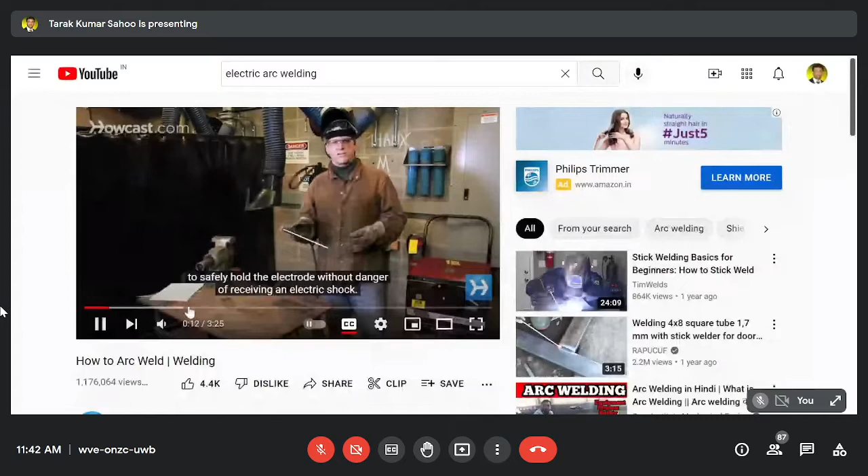Audio is clear, students? Students, different audio is clear? Yes, sir.

So you see welding here, the machine is on and the ground clip is connected, so you can see here, this is your base metal. All of you can see my arrow, isn't it? Yes, sir. My cursor arrow, all of you can visualize, isn't it, which I am rolling on the video screen. Okay, so this is your base metal in which one connection is given.

This is your positive connection, the anode connection. This is given to the work material. Basically we call the base material as work material. And the part of the connection which this person is holding with his hand, that is your cathode or negative point. So to the negative or cathode point, this rod is being attached. This is the electrode material. Now this electrode material he is using for electric arc welding.

Okay, so let us play this video and let us see how this welding procedure is being carried out.

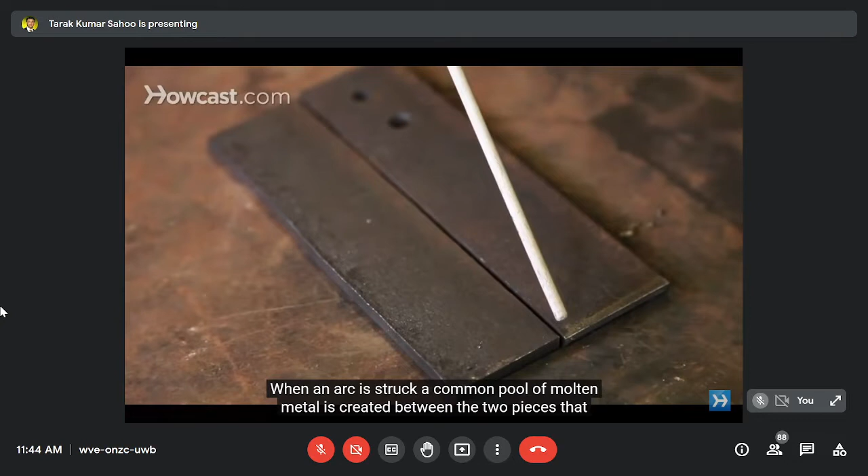The electricity flows through the electrode holder, down through the work, and back out through the ground clamp back to the welder. When an arc is struck, a common pool of molten metal is created between the two pieces being joined. Into this, the melting alloy center of the welding rod is deposited, completing the weld.

One thing to be careful of: as you're welding, this rod is being consumed, that is, it's growing shorter. So the operator has to constantly be aware of both moving the rod laterally, but also pushing the rod into the seam being welded.

The first step in learning how to arc weld is learning how to strike the arc. Striking the arc can sometimes be very difficult at first. It's a delicate flicking motion, not a stabbing or a quick drag, but as if you're striking a match gently. Once the arc has started, the trick is to maintain a nice smooth molten puddle of metal with a consistent distance between the tip of the welding rod and the surface of the work.

All right, let's give it a try. Welding hood's down. Remember, never look at an arc with the naked eye.

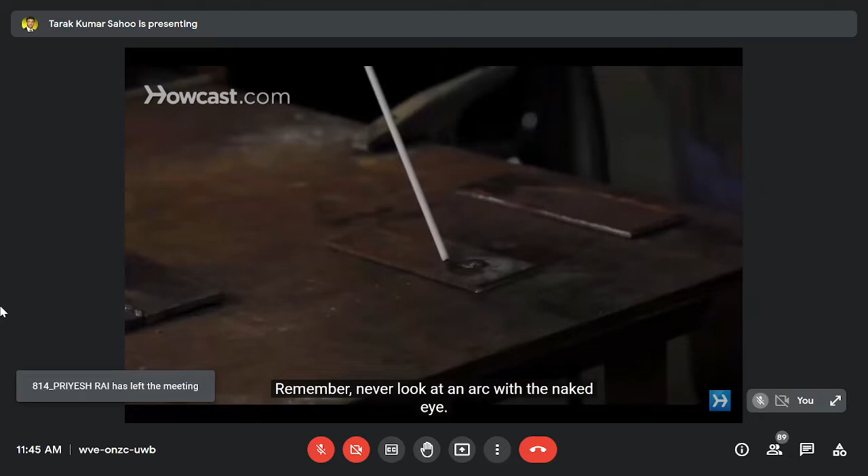Now that you've mastered striking the arc, and it may have taken you several tries, don't be discouraged. Let's join some metal together. Hood's down. After striking the arc, I create a nice even pool of molten metal. You'll notice that the tip of the welding rod stays very near to the arc puddle, and that I'm also slightly wavering the tip of the electrode back and forth. The idea is to heat both pieces of metal evenly as the filler rod is being deposited.

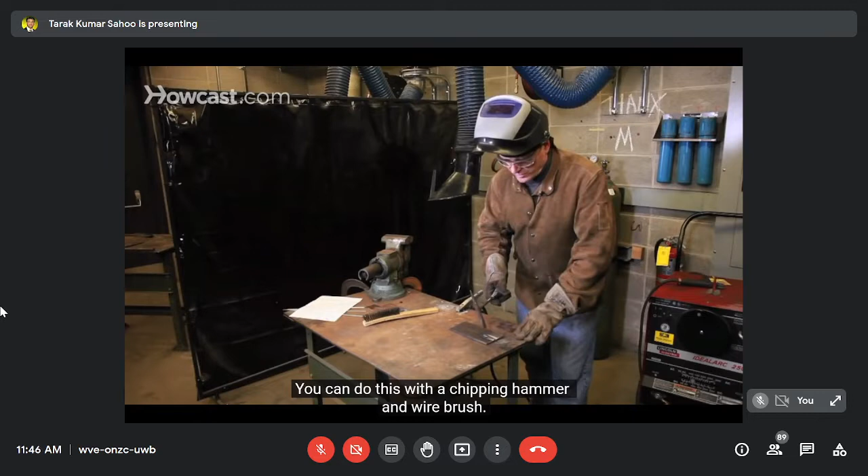Once you've completed your arc welded seam, you'll notice there's a blue-black residue on top of the weld. This residue is a byproduct of the burning flux. It needs to be cleaned away from the weld. You can do this with a chipping hammer and wire brush.

Okay students, have you seen, those who have not seen what is arc welding, through this video I think you have now understood what is arc welding. So such type of arc welding we are going to learn in this EMS lab class.

Yes sir, so now I am going to play the arc welding experimental video one by one, and we will learn out of it.

This is the welding section. The purpose of welding is joining the metals.

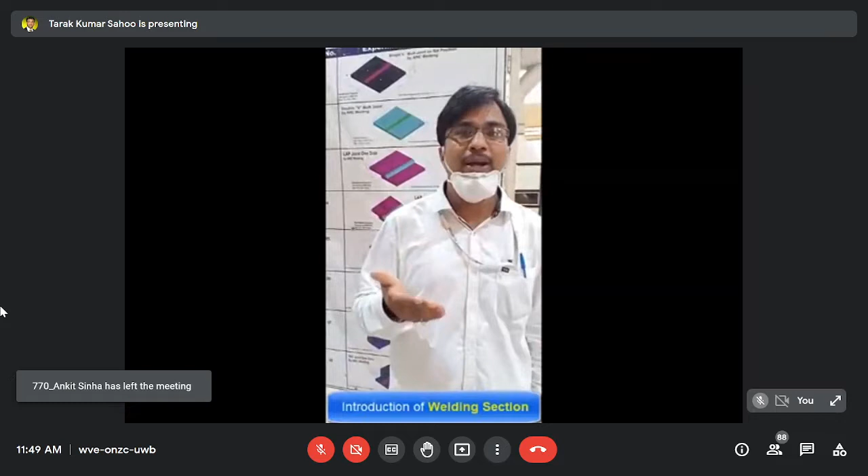It may be ferrous, it may be non-ferrous. How? By producing heat. When you produce the heat, the temperature depends upon the melting point of the metal we have taken, and according to that, which filler metal we have taken, and according to the diameter of that filler metal, we can adjust the current.

The formula for adjusting the diameter of the electrode is diameter into 40 plus or minus 20, to adjust the current. At the time of welding, the current and the filler metal we have taken, and the position also depend upon that.

Then the application of welding. What is the application of welding? Where is it applied? It is mainly applied in fabrication work. Fabrication means desks, bench, chair, table, grill, guardrails, then automobiles, the body of car, bike, ships, vessels, aircrafts, construction. Nowadays welding is very much essential wherever different joints are required.

Then the classification of welding. In a broad category, welding can be classified in different ways, mainly pressure welding or non-pressure welding, or fusion welding process. Where we can apply some pressure, that is pressure welding. Where we do not require that pressure, that is non-pressure welding.

Then according to the source of the electric current and the mixture of gases, the processes are arc welding and gas welding. There are more than 30 welding processes, but in the first semester you have the shielded metal arc welding process, which is performed by hand, a manual welding process.

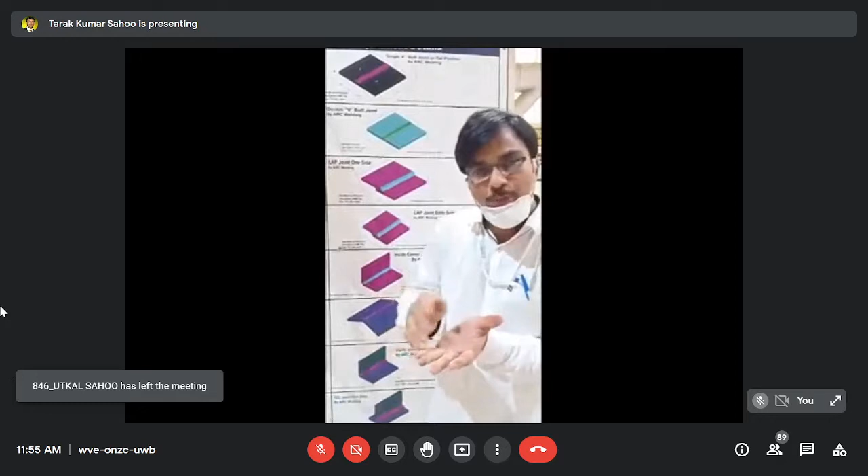Then we study about the different types of joints. Mainly in welding there are two types of joints: one is the butt joint, another is the fillet joint. In a butt joint, the pieces are side by side and the angle should be 180 degrees. This is one example of a butt joint, which diagram was already shown.

When the thickness is more than 6 millimeters, we need to maintain a root face and root gap between the two workpieces to pour material into. For that, it is necessary to prepare edge preparations. According to the edge preparations, butt joints are classified as single V, double V, single U, double U, single bevel, double bevel, single J, double J, etc.

In case of butt joints, then fillet joints, one type overlaps each other: lap joint, corner joint, T joint, and another one is the edge joint, whose diagram is not here.

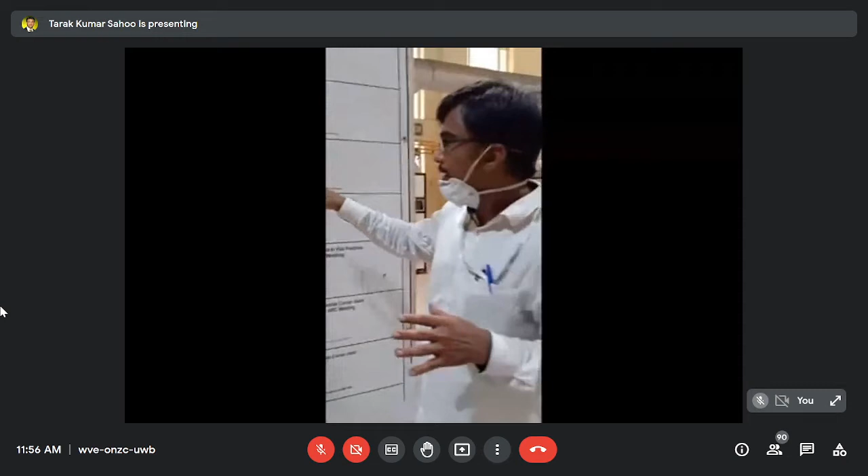We can perform a single side lap joint, or both sides welded for the lap joint. Here it is the single side, here the both side, T joints single side, T joint double side, lap joint one side, lap joint both side. These are the diagrams shown to you.

According to the joint designs, when you go for welding, the welder must know about the position of the welds according to that structure. According to the structures, when we go for different joint designs, 4 positions come out: flat, vertical, horizontal, overhead.

Flat means in the downward direction. Suppose these are the two workpieces, when joined, this is the electrode, held by the electrode holder. In the flat position, the electrode runs this way. The angle of the electrode can be fixed at 60 to 70 degrees, and it runs in this direction.

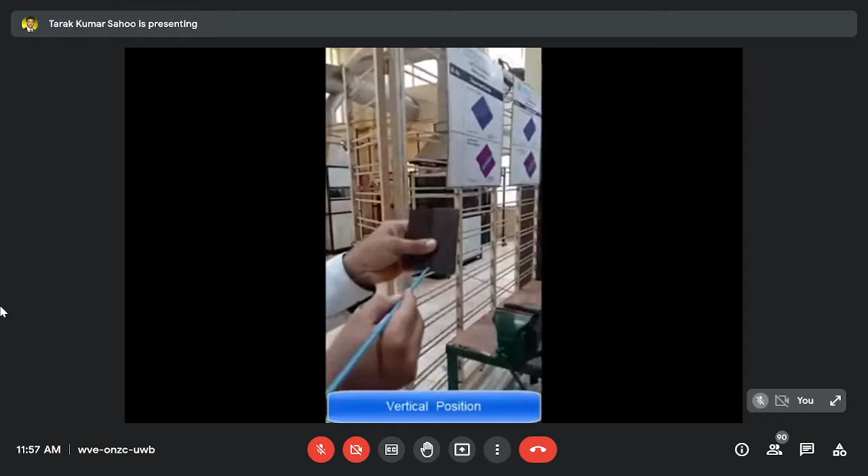If it is vertical, we keep the two workpieces like this, and the electrode runs from downward to upward, upward to downward. Then if it is horizontal, the workpiece is kept like this, and the welding goes left to right, right to left. If it is overhead position, the structure is positioned like this, and the electrode runs this way. These are the different positions necessary according to the joint design.

So students, have you understood this first video? Is anything not understood or not clear? You can ask me. Everything is clear in the first video? Yes.

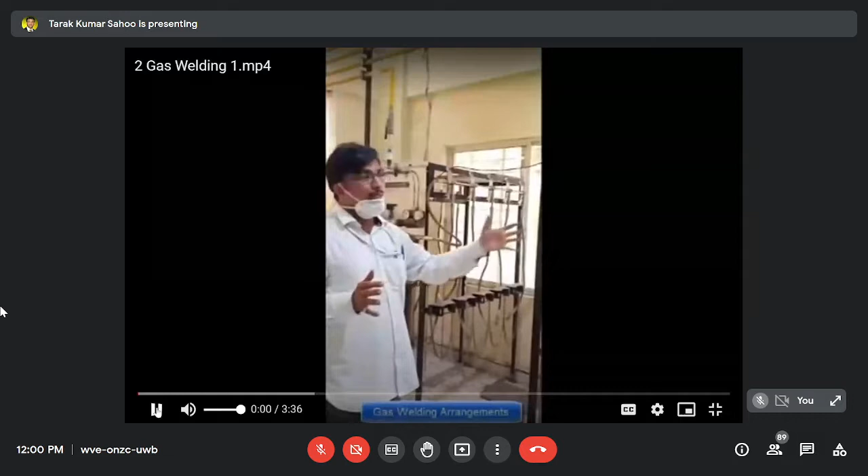Manifold system of the gas welding process. This one is for oxygen, this one is for CO2, this one is for argon, and this one is for acetylene.

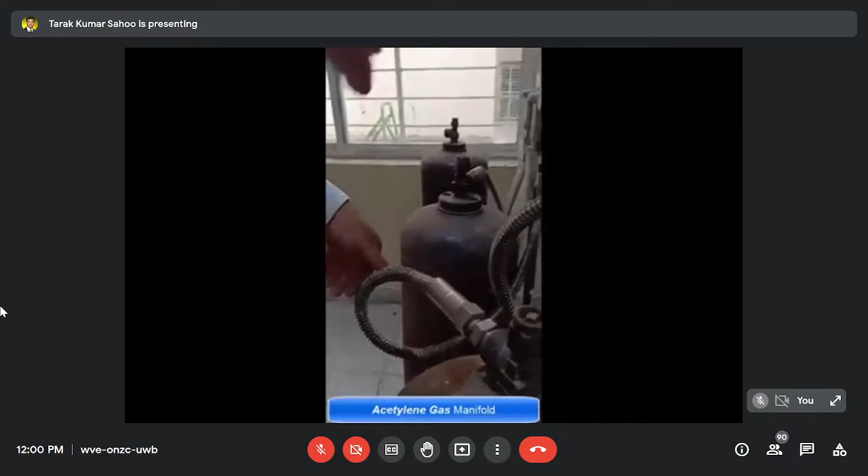Suppose we study about the acetylene manifold system. This is the acetylene cylinder. How can you identify the cylinder? Color is maroon, short in height, big diameter. Then this is the cylinder valve; we open the cylinder valve by the cylinder key. Then the gases pass through the stainless steel hoses. And this is the non-returning valve. Here we are using 4 cylinders at a time.

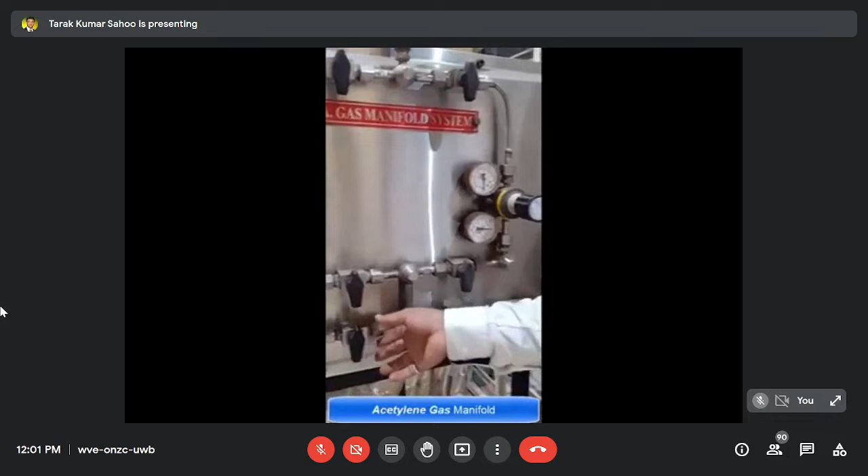Series of cylinders attached with the manifold systems. Then the gases pass through towards the station. This is the station, attached with the T-tapping point and then the ball point tapping points.

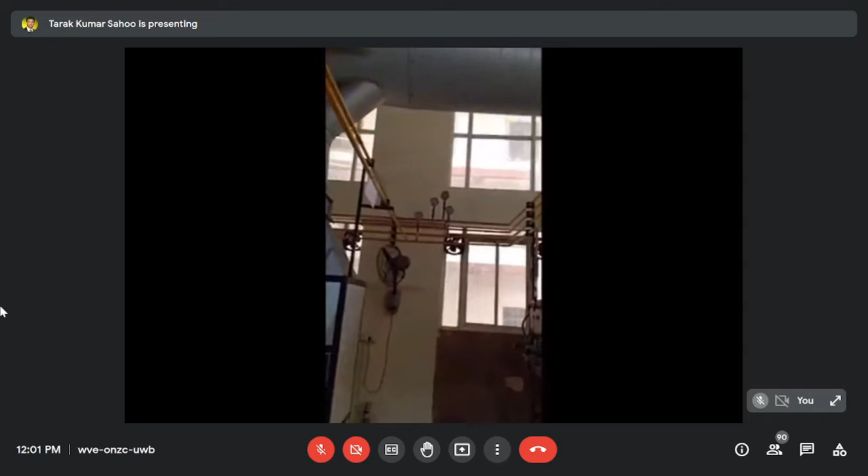This is the regulator. The function of the regulator is to minimize the pressure, to control the pressure. These are the two flow meters, one indicates how much pressure is inside the cylinder, another indicates how much pressure is going towards the work. The working pressure is indicated here as well as there, by the flow meters.

This is the flashback arrestor, and these are the different fittings attached. Then the gas flows through the pipelines towards the booth. After that, as we've already discussed at the time of gas welding, or preheating, brazing, cutting—these are different parameters, and different flow of the gas will be adjusted there.

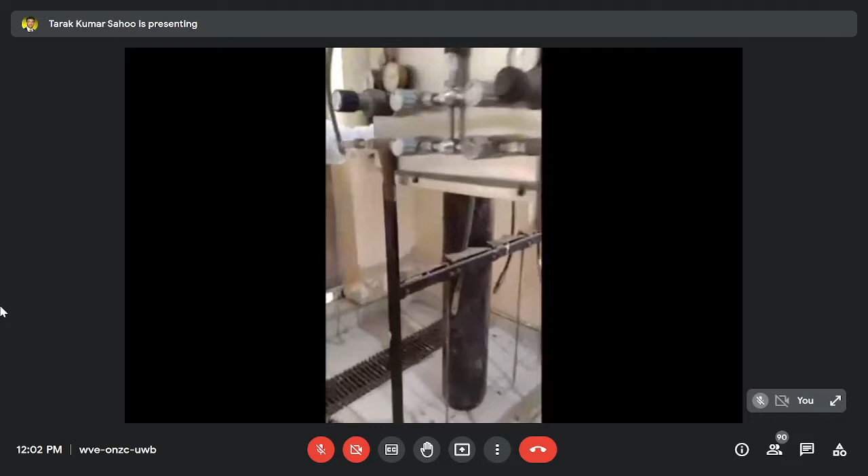This is mainly for the purpose of the oxygen manifold system. We can identify the cylinder—the color is black, long in height, small diameter, hemispherical shape.

Then we open the cylinder valve by the cylinder key. Then the gas passes to the stainless steel hoses, and non-return valves are also attached here. Here also we are using 5 cylinders at a time.

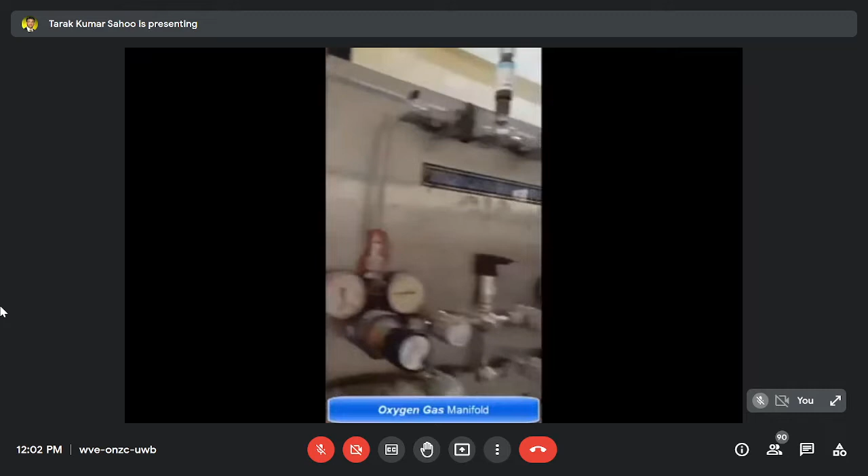Then, just like the oxygen acetylene manifold system, here we are using another one, the flashback arrestor. No need of flashback arrestor before that—only flashback arrestor before the one point tapping points, we have used here.

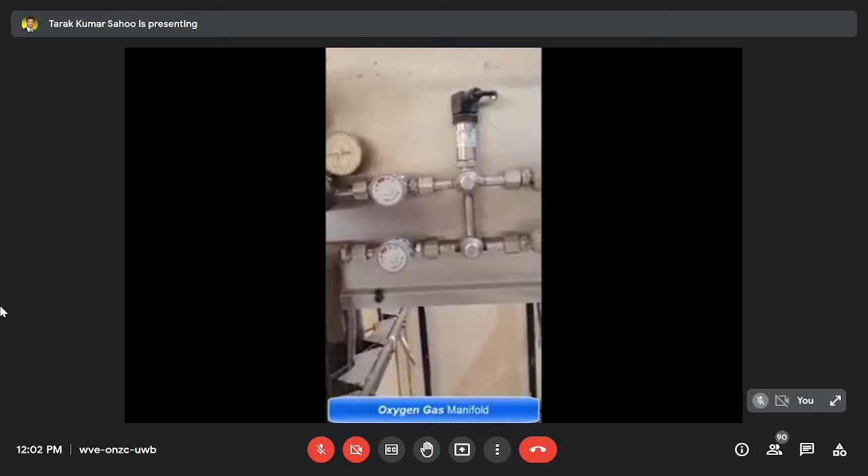Then these are the two valves. After that it comes towards the regulator. The function of the regulator is to minimize the pressure, to control the pressures. Then on the right side we can indicate increase, and the left side is decrease.

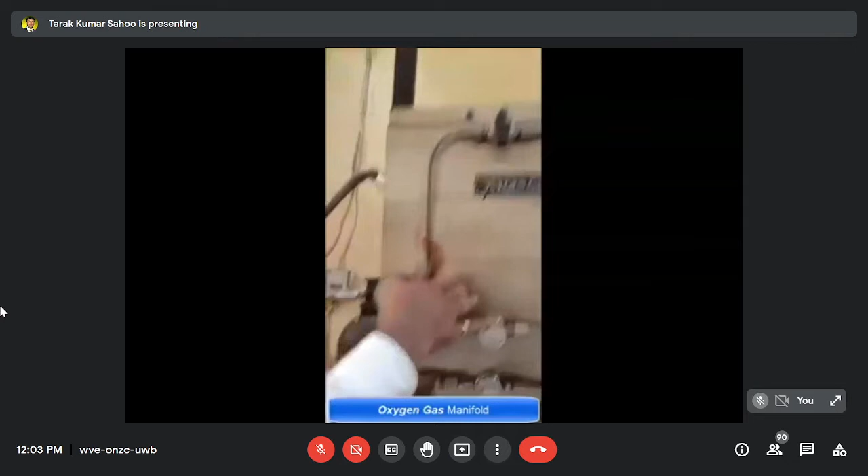It indicates on the left side what is the pressure inside the gas, how much flow. On the right side, according to that flow meter, both the gauge and the pipeline indicate the same. After that we can open the T-tapping points, then the ball point tapping points, then both gases—acetylene and oxygen—flow in the pipelines towards the booths.

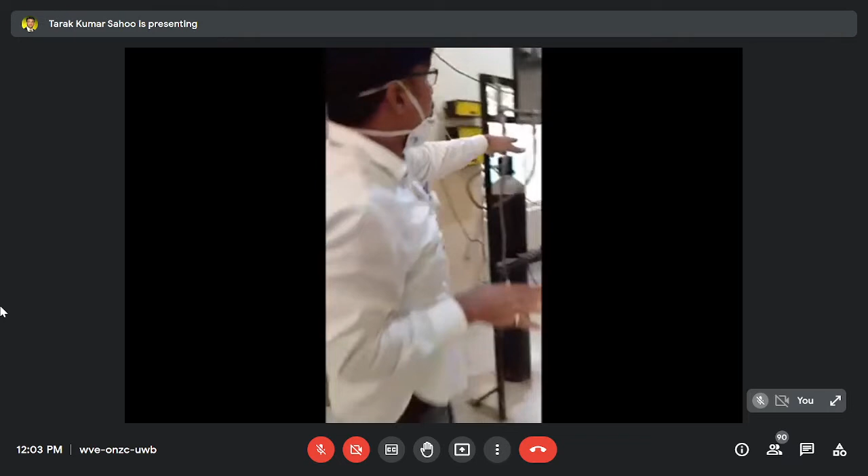The purpose of gas welding in the manual process is for the first year students. And these two are the CO2 and argon, for the purpose of MIG welding, and for TIG welding we will study later.

So students, on this gas welding, do you have any query?

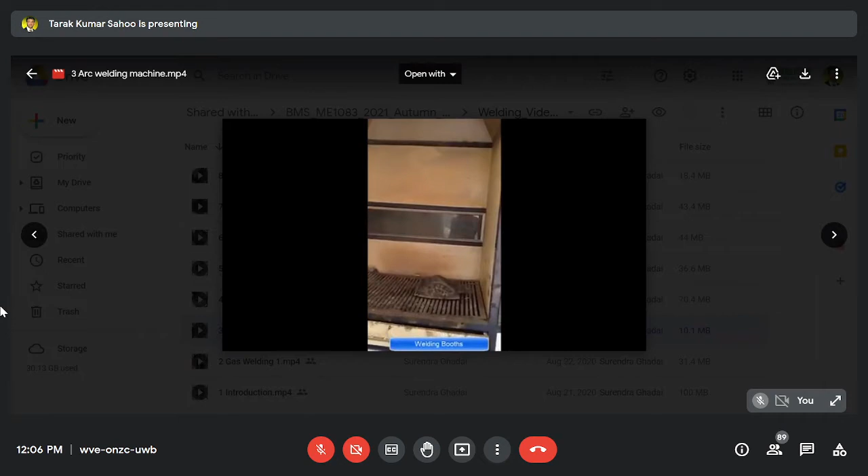First booth, second booth—first booth already we have discussed, that is the master booth, booth number 2, booth number 3, booth number 4, booth number 5. These may be used for the manual metal arc welding process or shielded metal arc welding process, as well as tungsten inert gas welding process or gas tungsten arc welding process.

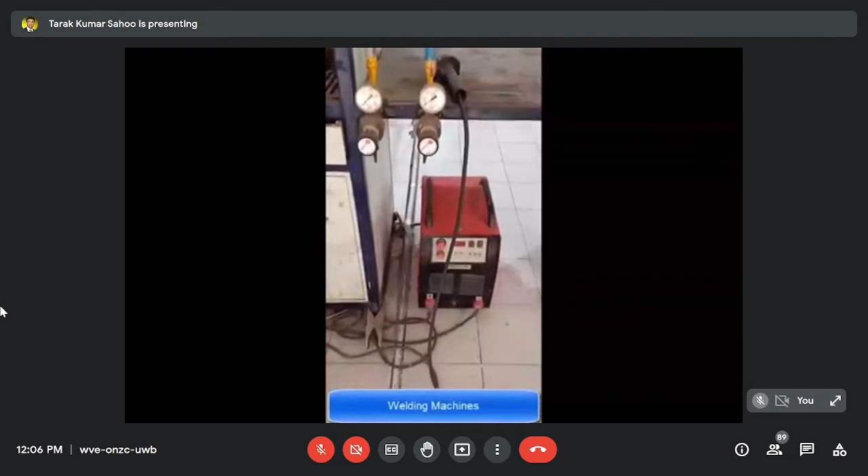And booth number 6 is only for the purpose of metal inert gas welding or gas metal arc welding process. Here we are using different types of machines we have already studied about—the step down transformer, and another machine we have, that is the inverter type welding machine. In the inverter type welding machine, the output voltage is low voltage, with different parameters.

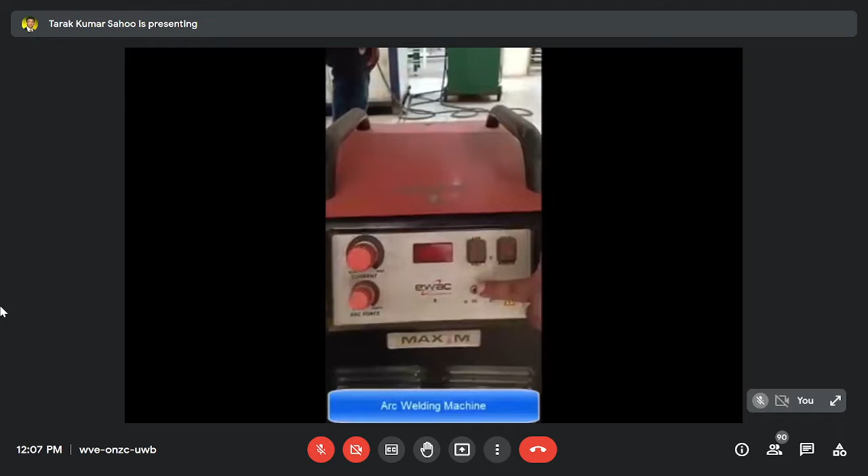Here it is arc force, then current, how much current it indicates. These are different parameters—amperes, voltage, local modes and remote modes, over current, over temperature, undefined mode. Current minimum, maximum, increase or decrease, then arc force, whether it is decrease or increase, 0% to 100%, and it indicates here how much current we can adjust.

Okay students, any query on this? Sir, can you explain it once more, I didn't understand. Louder, I didn't get it. Can you play it again, I didn't understand. Once more. Yes sir, okay.

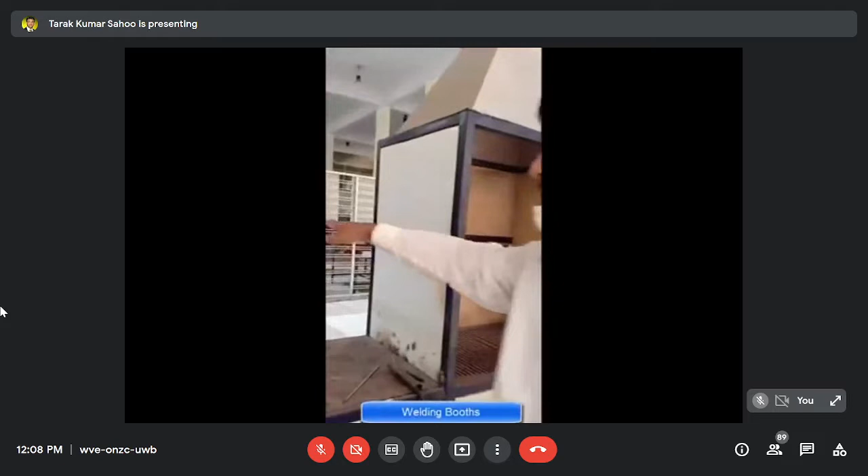First booth already we have discussed at the master booth, booth number 2, booth number 3, booth number 4, booth number 5, or are the purpose for maybe the metal arc welding process, as well as tungsten inert gas welding process or gas tungsten arc welding process.

And booth number 6, metal inert gas welding or gas metal arc welding process.

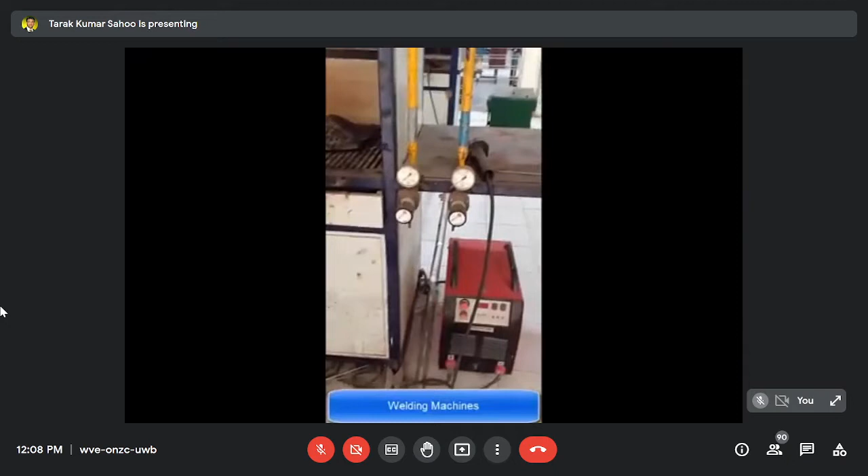Here we are using different types of machines that we have already studied, that step down transformer, and another machine we have, that is the inverter type welding machine. In the inverter type welding machine, it produces low output voltage and different parameters.

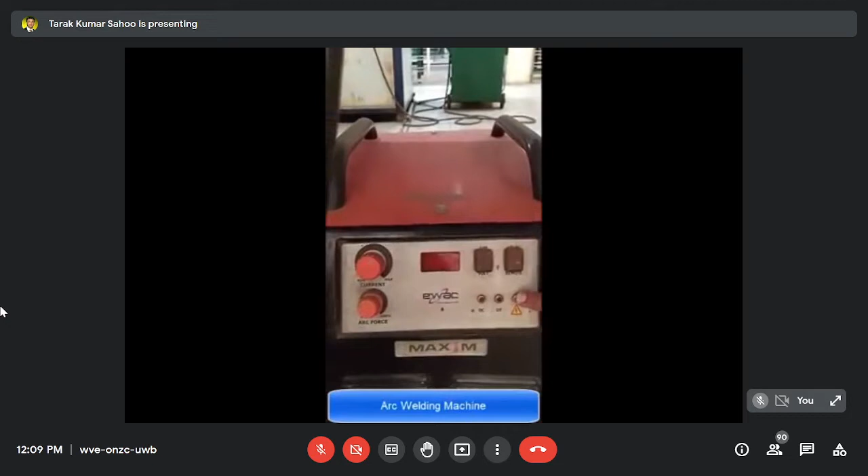So have you understood it? How arc welding happened, I still didn't understand. Hello, which question, who? So how is arc welding working? I was not able to understand how arc welding was working. How is arc welding used?

Yeah, how arc welding is used to join two metals. Arc welding is a fusion welding process which is used to join metal to metals. An electric arc from an AC or DC power supply creates intense heat of around 6500 degree Fahrenheit, which melts the metal at the joint between two workpieces.

Clear? Yes sir. And the source is the electric current, whereas we are using a machine, whether that produces AC, whether that produces DC, whether it converts AC to DC, meaning the transformer or generator or rectifier or inverter.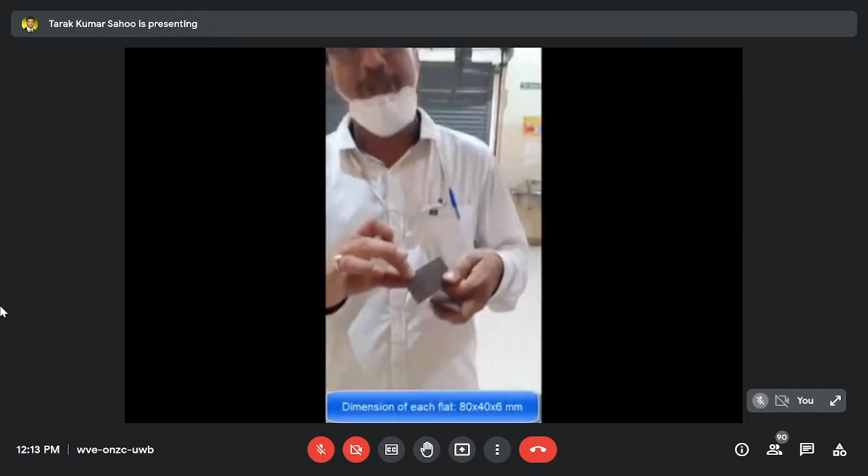Welding system to prepare a lap joint in MS flat system by arc weld. For that, we cut the raw material, two pieces of MS flat having dimension 80 is the length, 40 is the breadth, 6 is the thickness. 80, 40, 6 thickness, 2 pieces.

Equipments required: we have already discussed the step-down transformer, another machine we have is the inverter type welding machine. Number 2, electrode holder. We have already seen arc welding cable, cable connector, earth clamp, hand screen, hand gloves, chipping hammer, wire brush, tongs, the common tools which we have used, bench vise, hacksaw, flat file, then the measuring instruments, steel rule and try square.

And just discuss about the different tools which are essential during the time of welding. Then here we have studied about the bench vise. This is the bench vise. The bench vise is a common tool which is used as well as in the fitting section. The purpose of a bench vise is as a holding device, it holds the job at the time of cutting, filing, chipping.

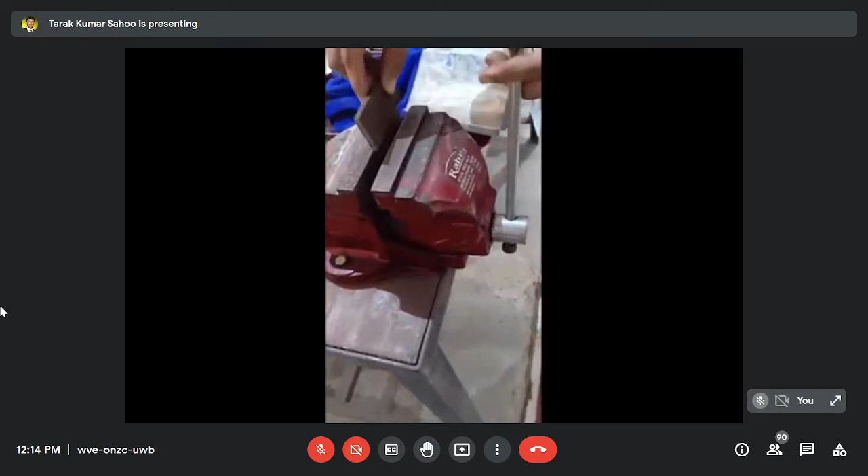The workpiece is fixed in the bench vise by moving that handle clockwise and anti-clockwise. These are the two jaws, fixed jaw, movable jaw, jaw plate. Then the body, then the handle. Okay, these are the different parts.

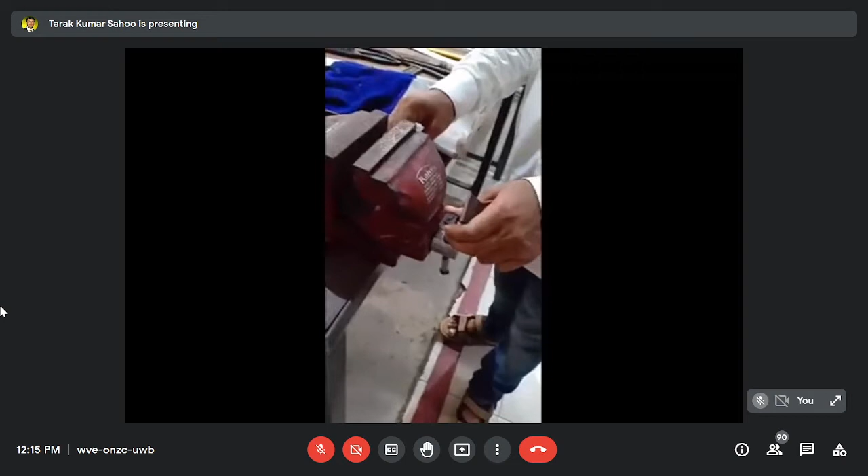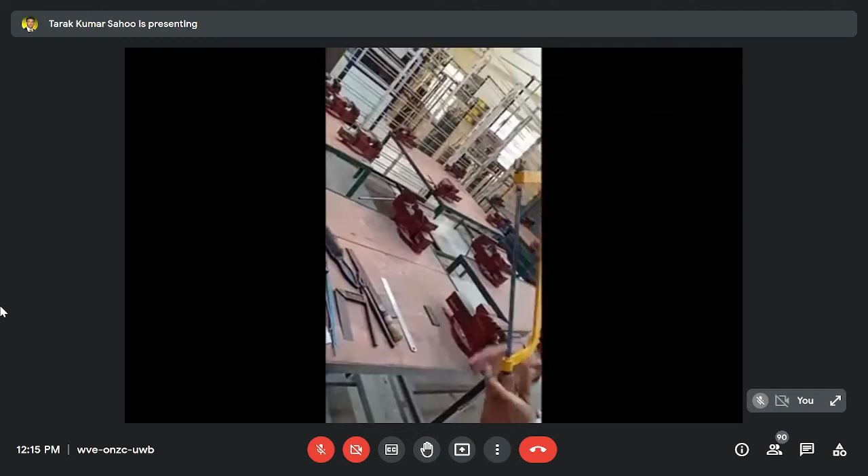Hacksaw: handle, frame, wing nut, retaining pin, eye hole, blade. When you fix the blade, the teeth should face the forward direction towards cutting. When you cut that material, I'll show you, the workpiece is fixed here, and we cut just like this process.

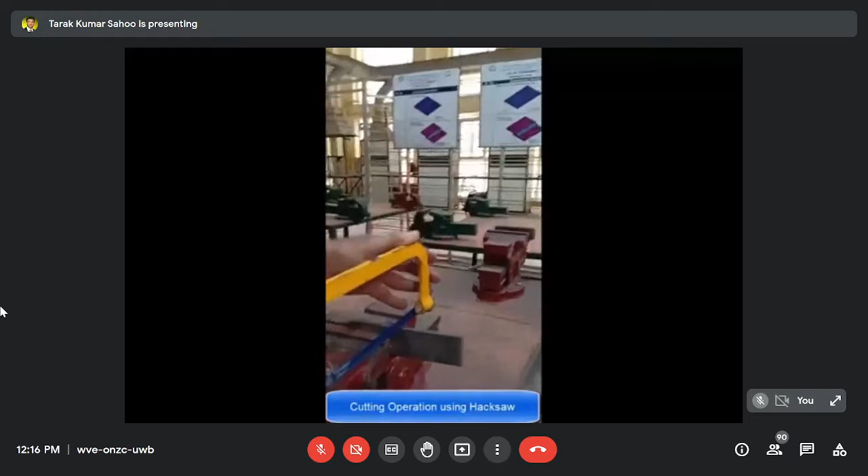Just like this process, forward and backward, and your position just like this. Your eye should be concerned there. And just one step before, when you cut that material, the blade moves continuously, just like this, from cutting to the end.

Then this is the flat file. In the fitting session, you have already studied the specification of file and the classification of file. The specification depends upon the shape, size, grade, and cut.

Among that, from the shape, we have studied about the flat files. The purpose of the file is filing. What is filing? Removing the unwanted material for facing and right angle. Different parts: handle, ferrule, tang, shoulder, face, tip, edge. These are the different parts of the file, made out of high carbon steel.

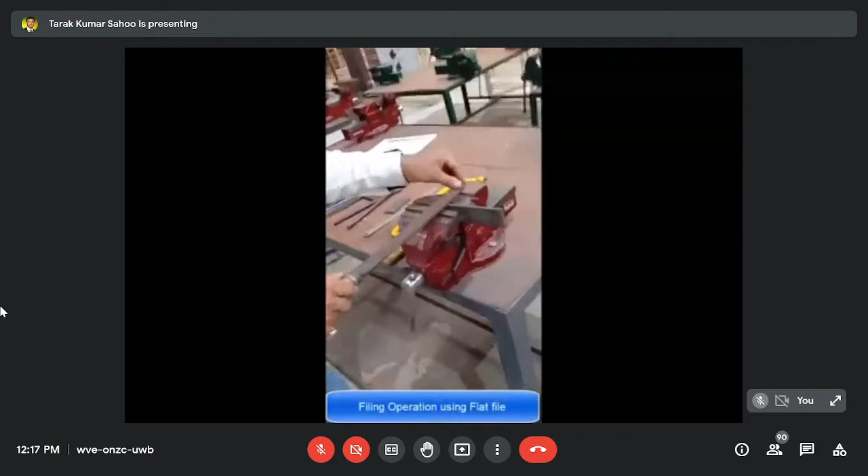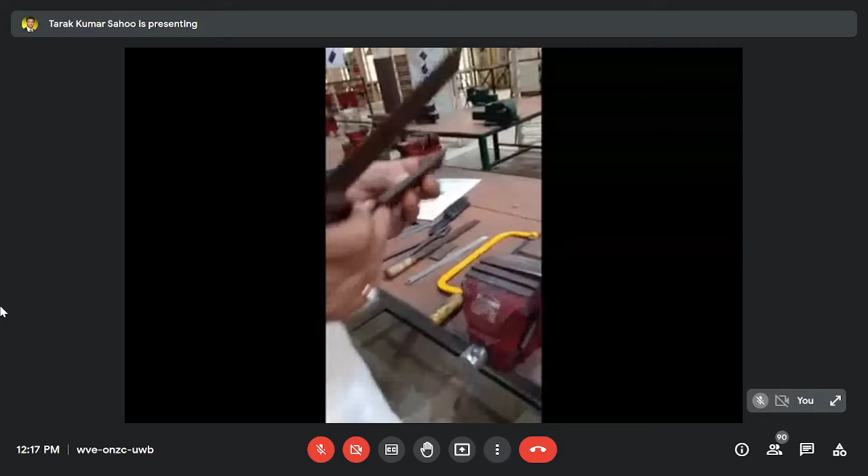When you file, just like that is the process, the position is just like that, forward and backward. You see here, after filing, the metal is reduced, and it is for facing a right angle. You see here, after filing it is shown you facing. After filing, whether it is facing or for getting accuracy, we have to check by the try square.

This is the try square. Beam and blade, these are the two parts of the try square. It is used for checking whether the workpiece is at the right angle or not. Just like this, if between the blade and the workpiece after sliding the light can pass, we can check whether it is perpendicular or not. Then we can identify whether the workpiece is right angle or not, and we can get the accuracy after that.

Chipping hammer - the function of the chipping hammer is to chip the spatter and slag. Due to long arc length, when we weld the materials, the metal itself is not deposited properly. At that time we get spatter, one type of welding defect that occurs. By the chipping hammer, we chip the spatter and slag.

The flux, after burning the electrode, covers the bead - that is known as slag. That slag and spatter are removed by the chipping hammer. After removing the spatter and slag from the workpiece, we clean the surface through the wire brush - steel wire with a fiber handle.

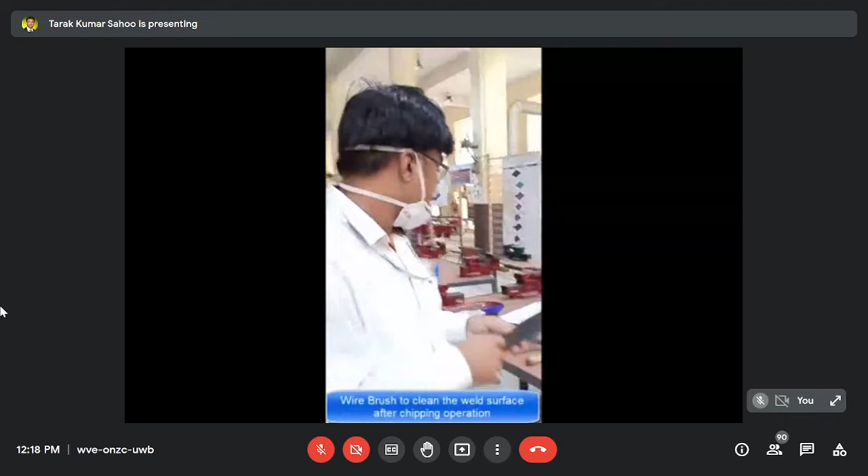Tong is a welding device. We have studied different types of tongs in different sections. In welding we use two types of tongs - the flat tong and the apron tong. The purpose is for handling the workpiece after welding. After welding, the job is in hot condition, that's why you use the tong for your safety purpose.

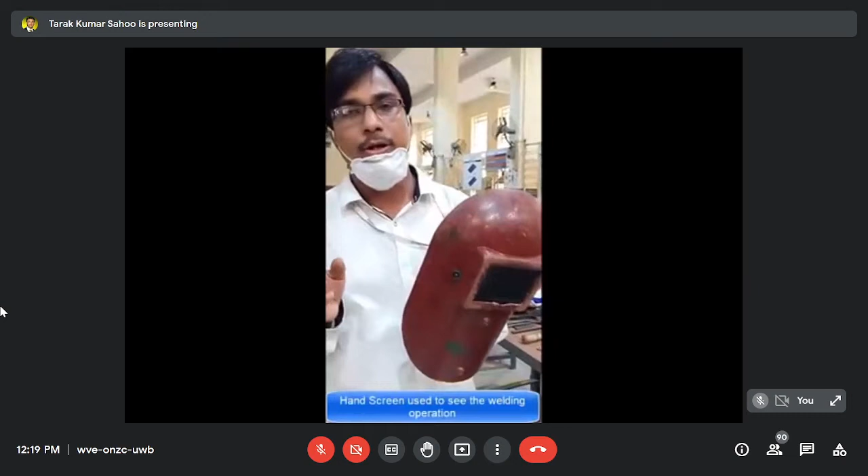Hand gloves protect your hand, palm and fingers from spatter and heat for personal safety. This is a hand screen. Two types of screens are used in the welding section: hand screen and head screen. Head screen looks like a helmet. In overhead and vertical positions we use the head screen, and in horizontal and flat positions we use the hand screen.

This is made from stainless steel. It is a measuring tool, for measurement of length and breadth. Its accuracy is 0.5 millimeters.

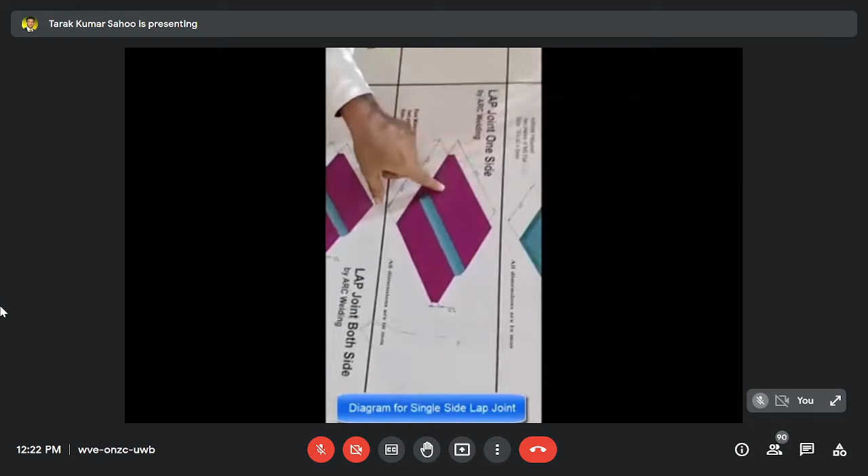Single side joints, one overlapping the other in the middle. First of all, we have taken a mild steel flat with dimension 160, because we have taken two pieces of 80 and 80, as already discussed. So one piece we have taken as 160. By the marking tool, scribe, we mark it using the measuring steel rule. After marking, it is held by the bench vise and cut with a hacksaw, divided into equal 80 and 80. During the time of cutting, some material is also reduced.

Cutting. Both surfaces, all sides should be filed by flat file for removing the unwanted material, for aligning a right angle. After that, we have to check whether it is perpendicular or not by measuring for accuracy using the steel rule.

After cutting and filing, the metal is reduced: 79 from 80, 39 from 40, 5.5 millimeters from 6 millimeters, because we have taken the raw material of required size 80, 40, 6 millimeter. After filing and cutting, reduced to 39, 6, and the length is 79.

Yes, any query, students? No sir, no sir. Okay.

Now we'll see the cutting and filing procedure done in the welding experiment. In the coming video, we are going to see the various filing and cutting procedures.

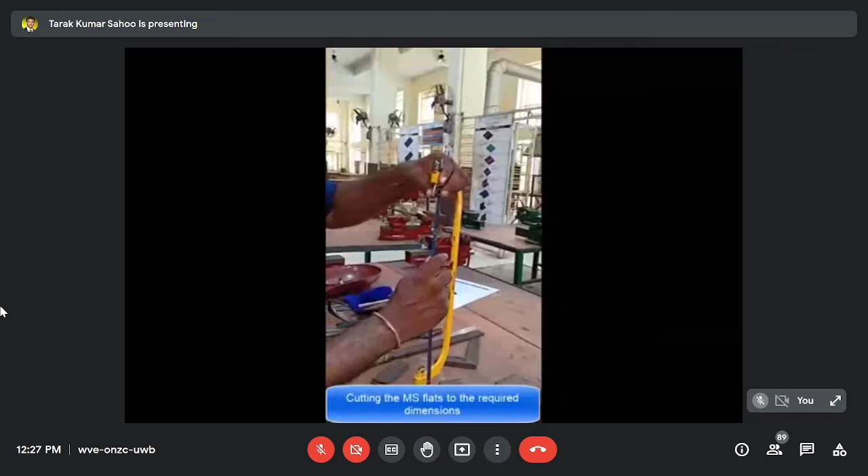This is the hacksaw. You can fit the blade in the forward direction. This is the pin, and this is the hole. Two side holes in the blade hold it in forward direction in the hacksaw. This is the wing nut, adjustable, and you tighten the wing nut to secure the hacksaw blade.

Adjustable, cut the material in the forward direction.

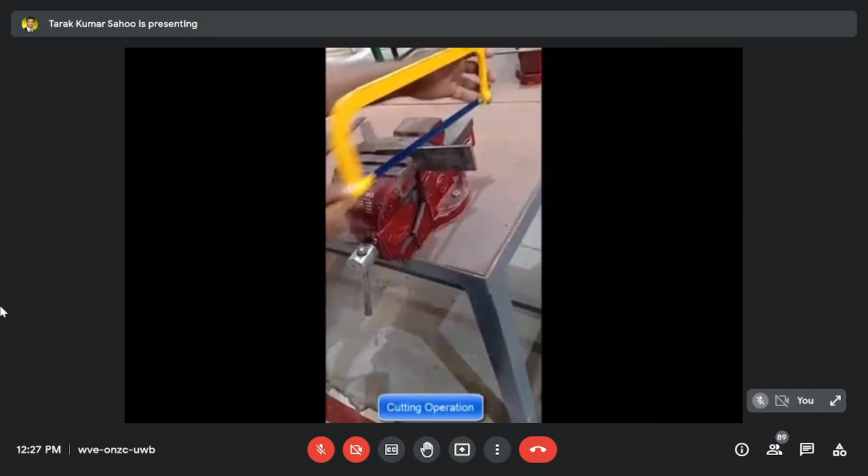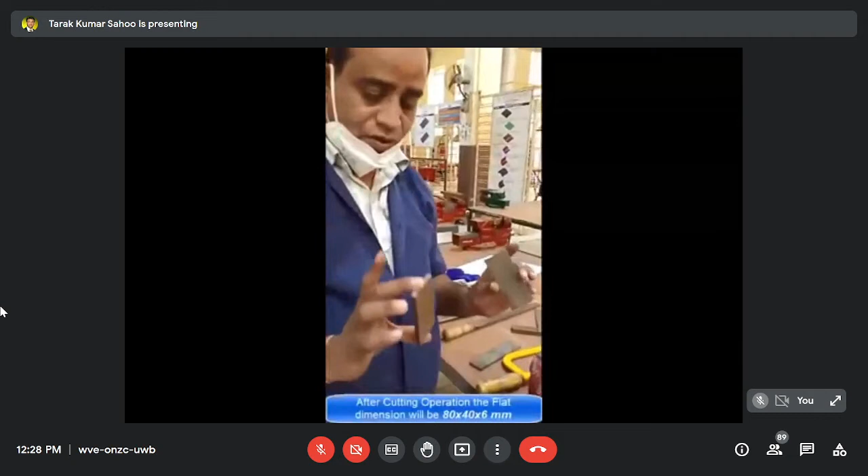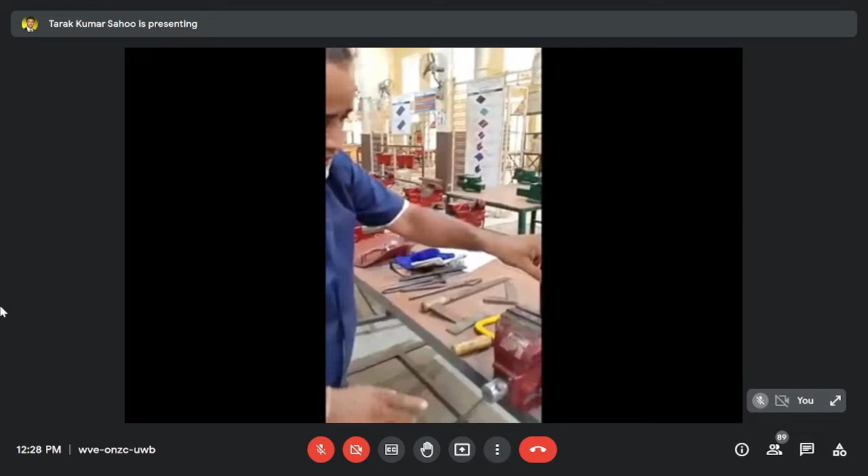After cutting the material, one part has length 80, width 40, thickness 6. After filing, length is 79 mm, width is 39 mm, thickness is 5.5 mm. Then to hold the material in this vice, first tighten this handle in the holding instrument, the vice.

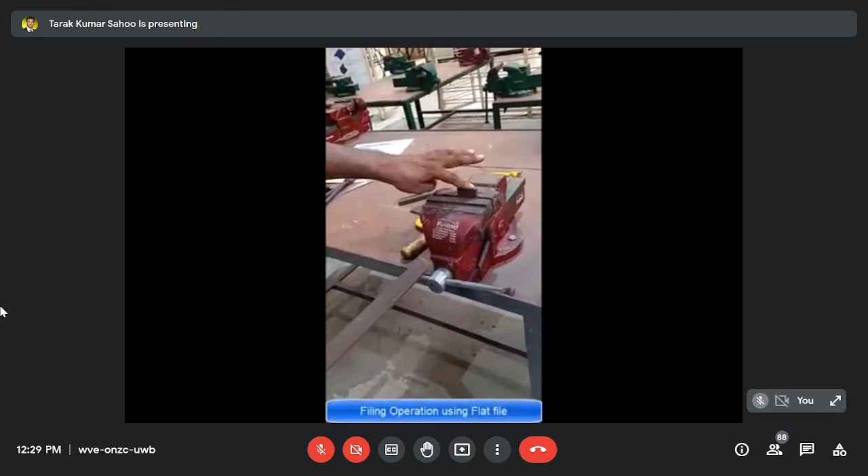This is the flat file, used to file the surface and sides to perpendicular, for the purpose of arc welding process. This is the filing process.

Complete this side, then the other side will be filed, holding the material in this jaw at position. This side will be filed. Complete this side, then surface filing.

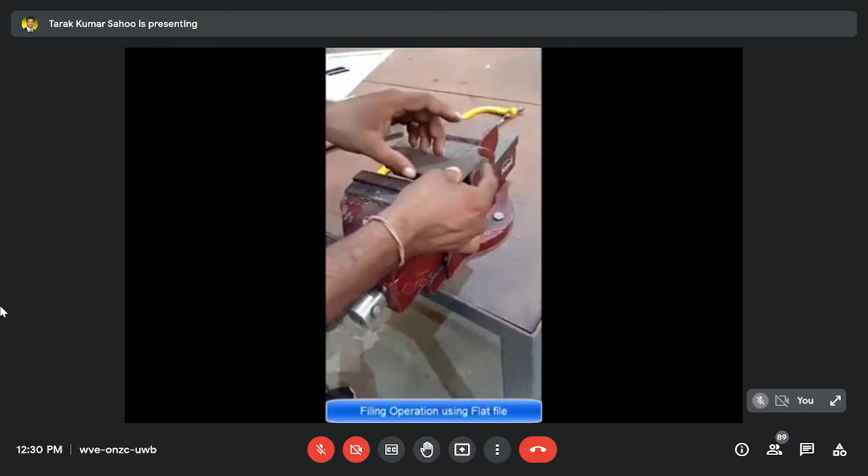Position the material, keep it using the flat file, then file the surface. Because carbon percentage is more.

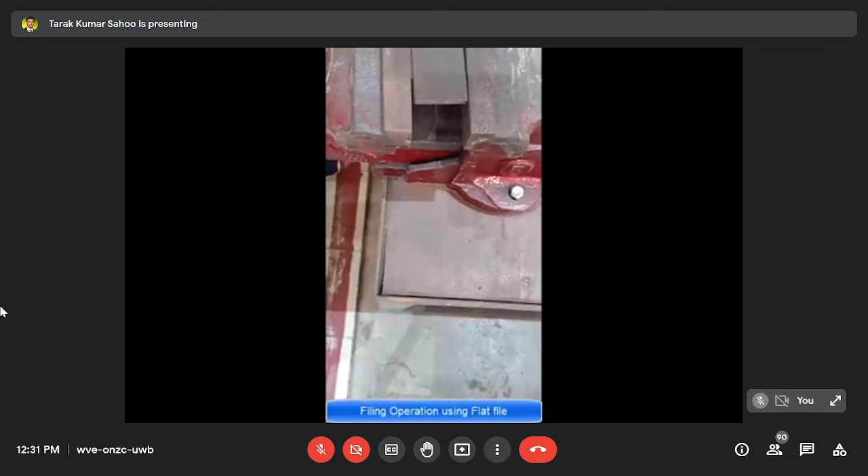Complete this side, other side will be filing. Same process. Same process.

So this part is understood, students? Yes sir, yes sir. Okay.

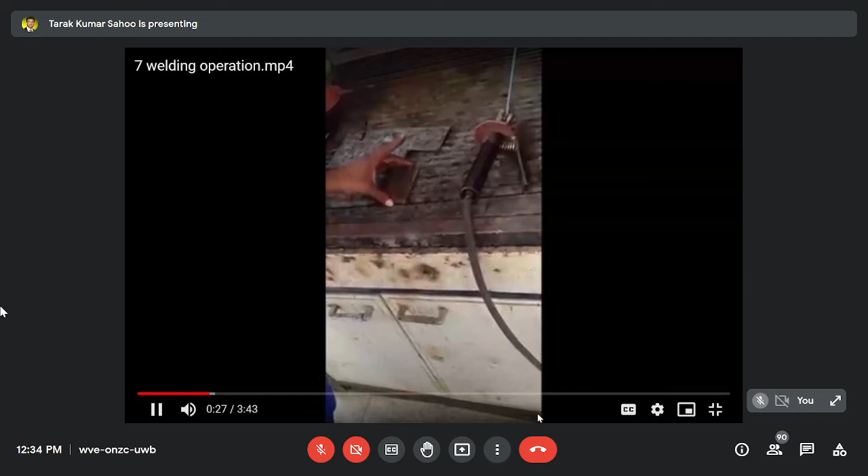First, you know what is lap. Lap is over the material on the surface of the material, this is called lap. And to keep this material in this table in flat position over the material, this position should be used in the welding booth.

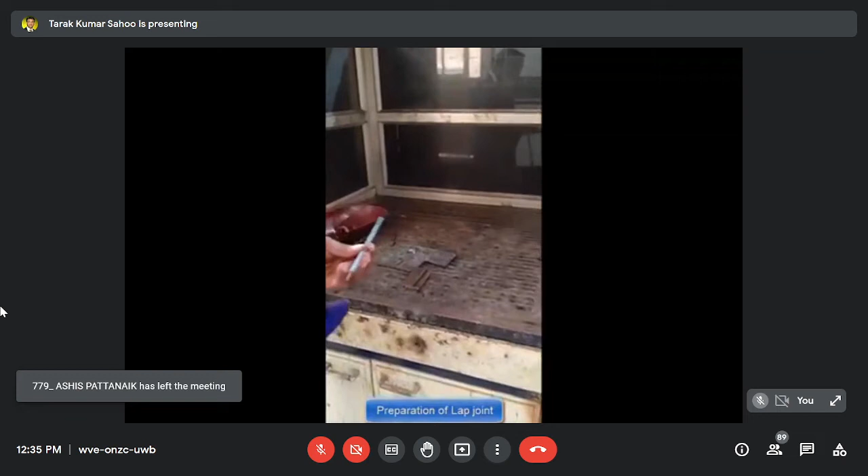Then this is the holder. Already completed this process, you know the welding process. To hold the material in this holder, this is the teeth. Teeth should be flat, horizontal, vertical, overhead, to hold the flat position at 60 to 70 degree angle.

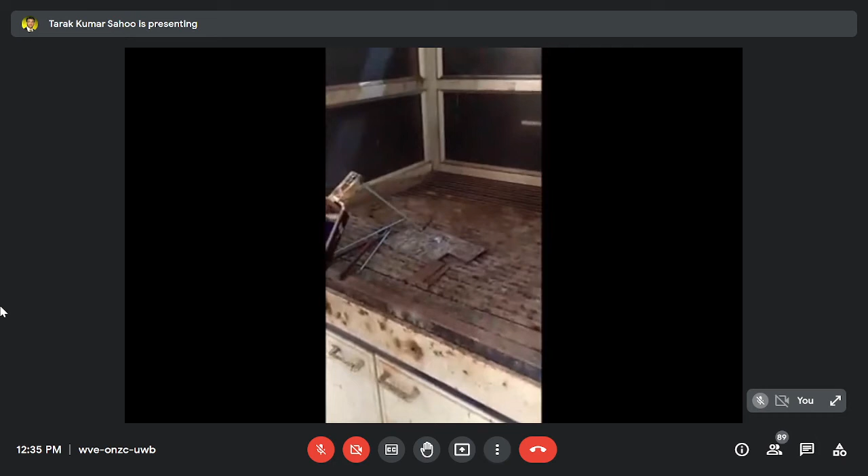Then this is the welding screen. Welding produces ultraviolet rays, so to protect eyes this is the welding screen. First you strike the material in the booth, check that the material will spark. First spark.

After practice, then strike the material. This is the weld material, side. This is the tacking purpose of welding. First tack, two side tack. After completing this side, then the back side will be welded.

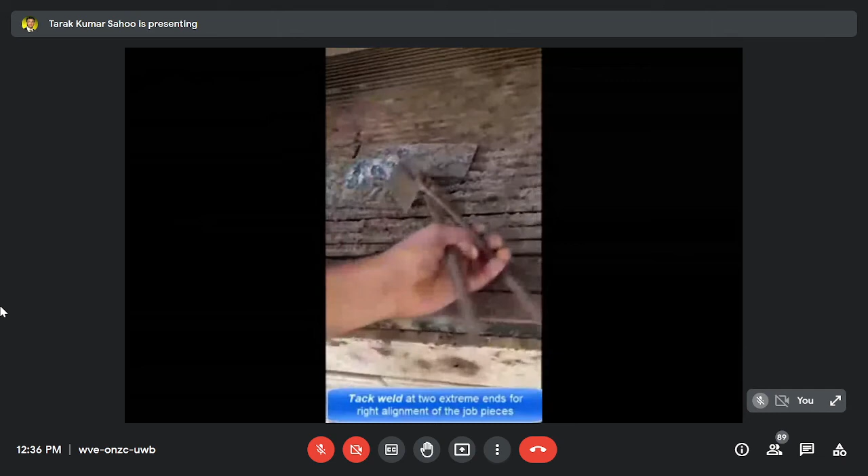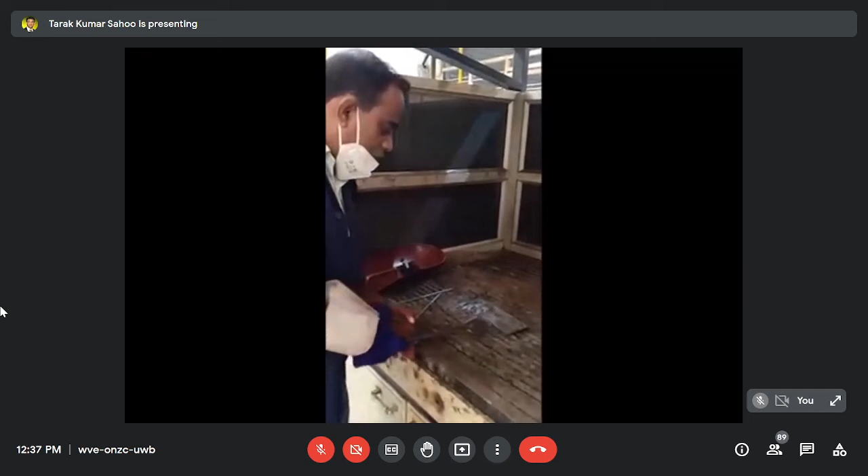After welding, to hold the material, it is heated to 3600 degrees Celsius. This is the long tongs used in welding.

Okay students, obviously if you have gone to the BMS lab physically, definitely this process of welding you must have done by your own hand. So this part is over. Have you gone through this part? Any query you want to ask about this? No, sir.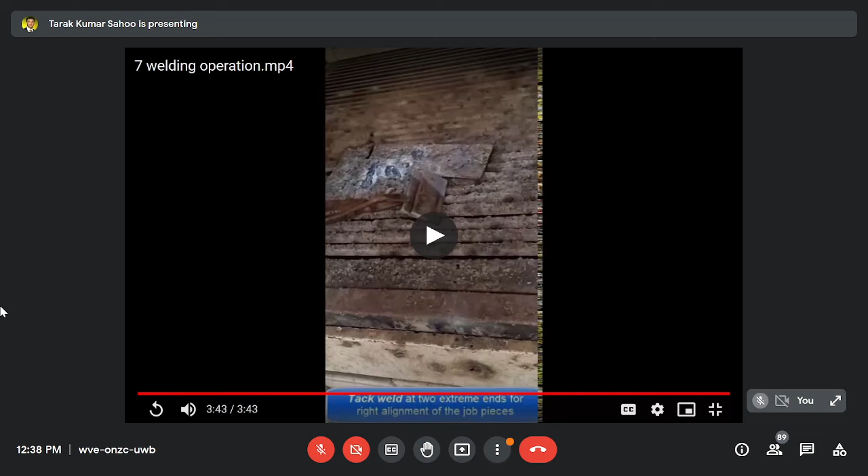Okay, so after welding, the final step is chipping. In that process, basically we try to remove the burnt slag which came out of your flux material. That we are going to see in the last part of the video. Okay, so if there is no question, I am stopping this and playing the next one.

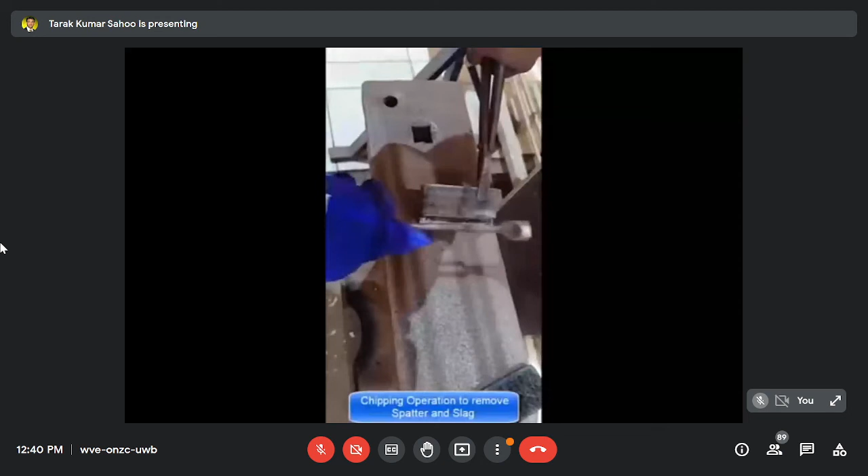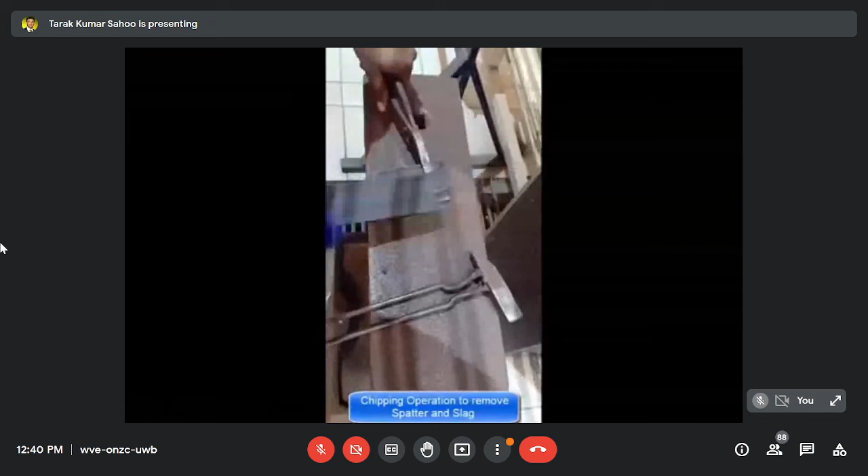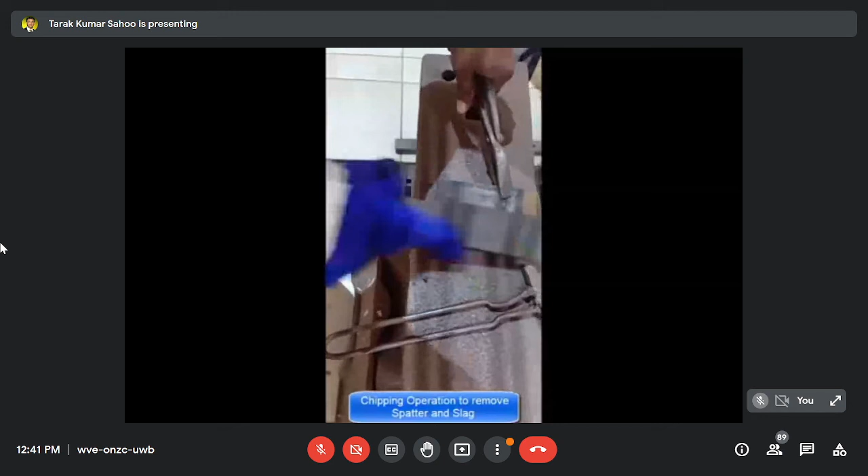Then use a wire brush to clean the surface. This is the way. Then you complete the chipping and cleaning of the material.

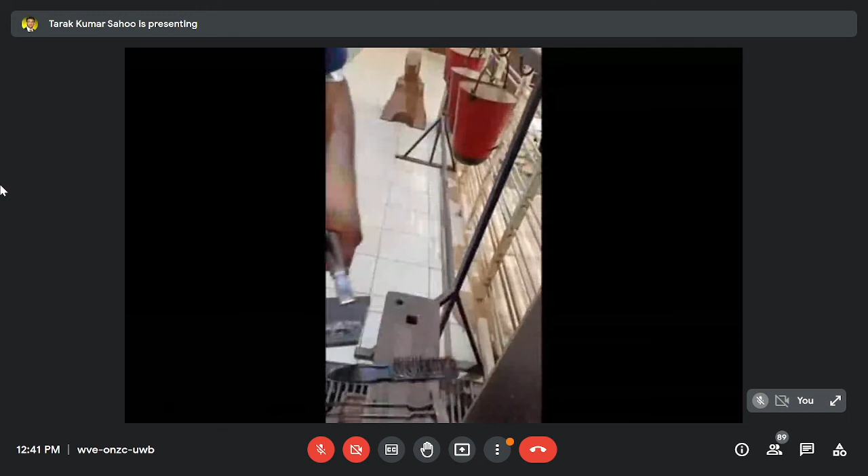Okay, so done. Any query on this? Since nobody is asking any query, may I ask a question to all of you? Can anybody tell me after the welding why this chipping and cleaning is necessary?

Sir, because slag parts came out, sir, like extra parts due to flux leakage, it came out. So we have to clean it. So the chipping and cooling process are needed.

I am just asking about the chipping procedure. For the cooling procedure, you have seen the sand cooling being used. You have dipped the hot workpiece material into the sand bucket, isn't it? Why have you used the sand bucket?

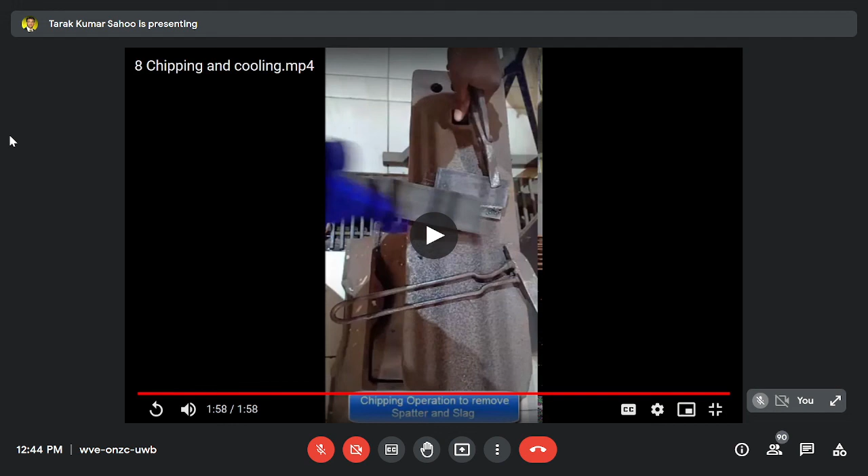So approximately all of you have some kind of knowledge about it, but a lot of theories are behind these concepts. So you must read, and you can gain more knowledge about it. For now, I'm not going to discuss those theories. Most of the qualitative points you have already told over here, so that is the point, that is the thing we must know.

Okay, so this is all about the video presentation of the welding lab experimental work. All of you have gone thoroughly through this, isn't it? Yes or no? Yes sir. Okay, so any overall concluding questions, final doubts, if you have any, you can ask. Otherwise we'll move on to conduct the quiz test for the welding procedure.

Quiz sir, we are going to have a quiz sir on welding. Yes, okay sir. Sir, it will happen now, because we don't have further classes to conduct the quiz. Okay sir, so now it's the time.